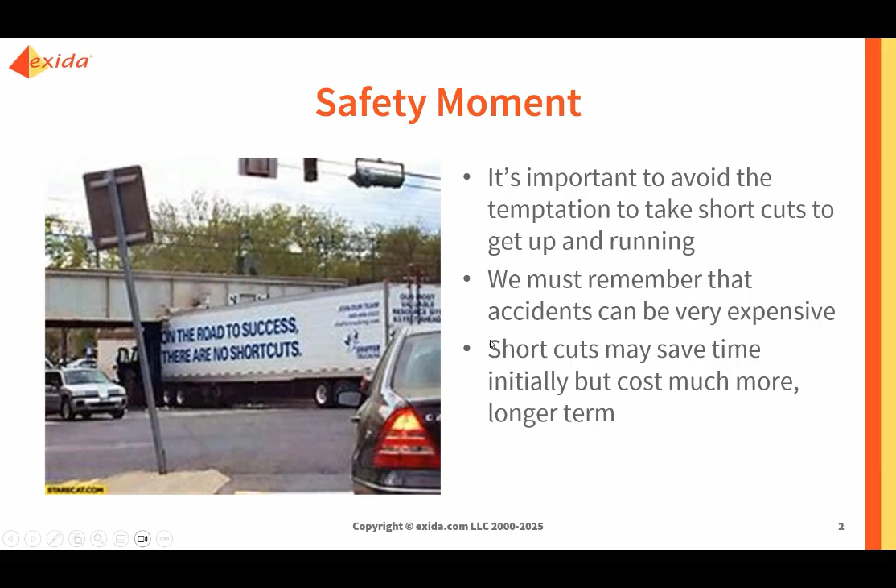Just before we begin, I want to take a safety moment to remind everybody that when we deal with functional safety, we have to avoid the temptation to take shortcuts to get up and running. This is always a problem when projects become a crunch and there is a rush to get finished so we can get the safety instrumented system up and running. We have to be wary of that, because what can happen is that systematic errors can creep in, and we could end up having issues further down the line that could lead potentially to some form of incident or accident, and we know these can be very expensive. So we must make sure that when we're looking to be successful, we cannot take shortcuts. That's just the thing to remember with functional safety that often gets overlooked when it's crunch time.

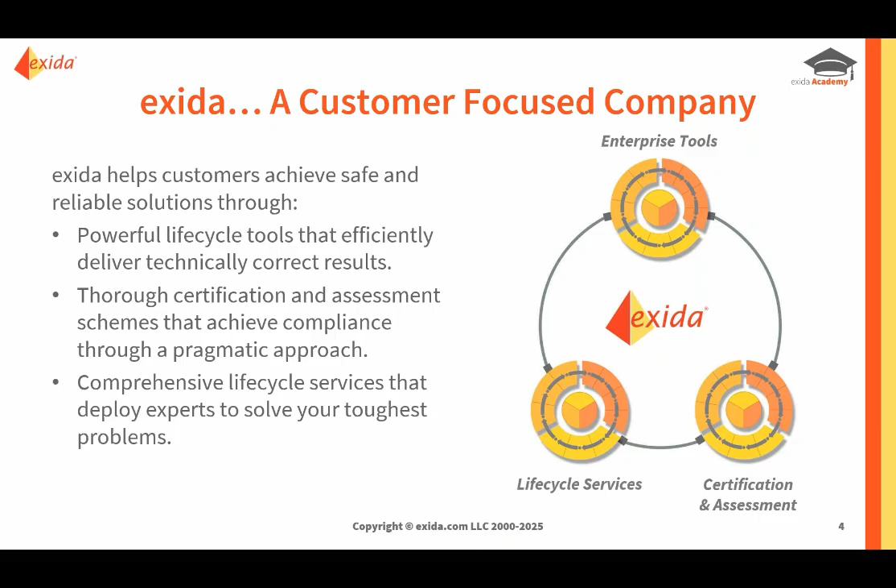We've grown exponentially since then. We don't just do certification for functional safety, we also do certification for cybersecurity and personnel certification. Some of you may even be CFSE or CFSP qualified. We've also started the Lifecycle Services division, which provides full lifecycle services for alarm management, cybersecurity and functional safety, including all the relevant training and documentation support. We also have a third division which deals with our software tools, the exSILentia tool, which some of you may be very familiar with. We've also grown from just the two original offices, we're global now. The nice thing about the three disciplines, functional safety, alarm management, and cybersecurity, is that it's industry agnostic. You can apply it to any industry, so we've worked in mining, pharmaceutical, food and beverage, oil and gas, chemical, machinery, etc.

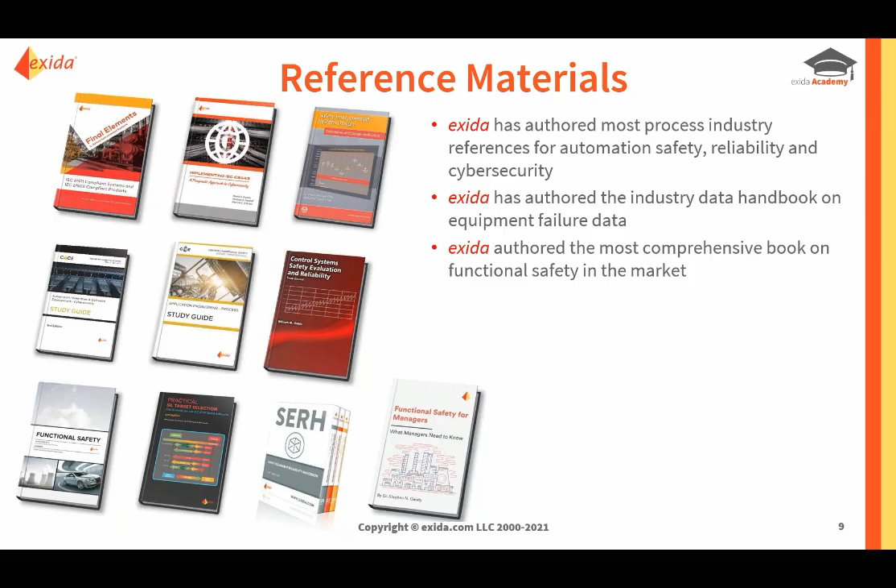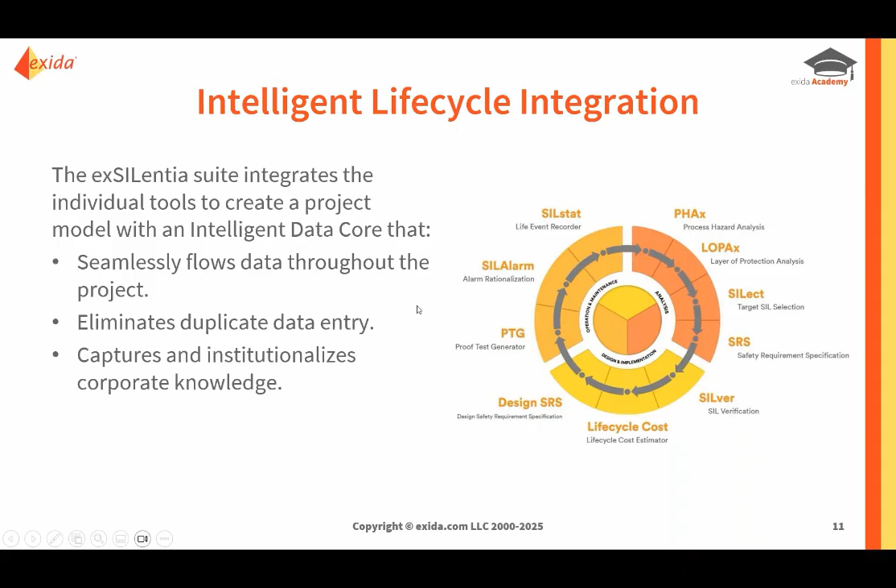The exSILentia tool allows us to do the full lifecycle support, so we can do the hazard and risk assessments all the way through to providing the life event recorder, so you can record all the safety instrumented system performance data as well. I'm not going to talk too much about that because I want to get to the meat of this, which is, of course, what is prior use justification and how to achieve it.

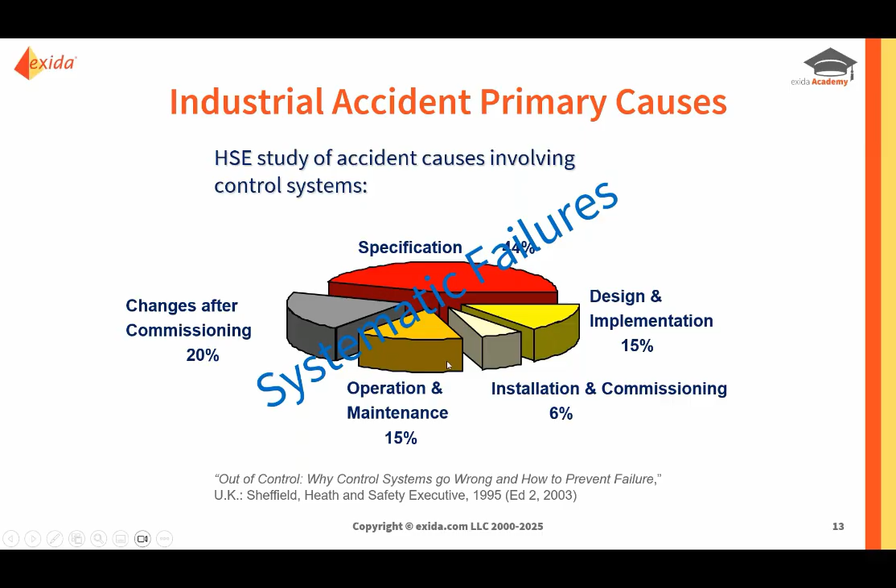Now, when it comes to the IEC 61511, it's based on a life cycle. And here again, it's different from previous standards since it's not prescriptive. A prescriptive standard would say this is what you have to do and this is how you do it - there's no leeway. Whereas with a performance-based standard, it will say this is what you have to do, but how you do it is up to you as long as you can measure your performance.

And with 1511 and 1508, they are both performance risk-based standards. Now, the major authorities, COMAH in the UK, OSHA here, requires operators of hazardous processes to follow best practice, or RAGAGEP - recognized and generally accepted good engineering practice. So 1511 and its equivalent, the ISA 61511, is recognized as being RAGAGEP.

And they're both based on a safety life cycle. So it's not a once and done, there are ongoing requirements. And there are 3 phases. There's an analysis phase - this is where we're analyzing the requirements for the safety instrumented system to help us mitigate identified hazards and make sure that we have sufficient risk reduction in place to meet our tolerable risk.

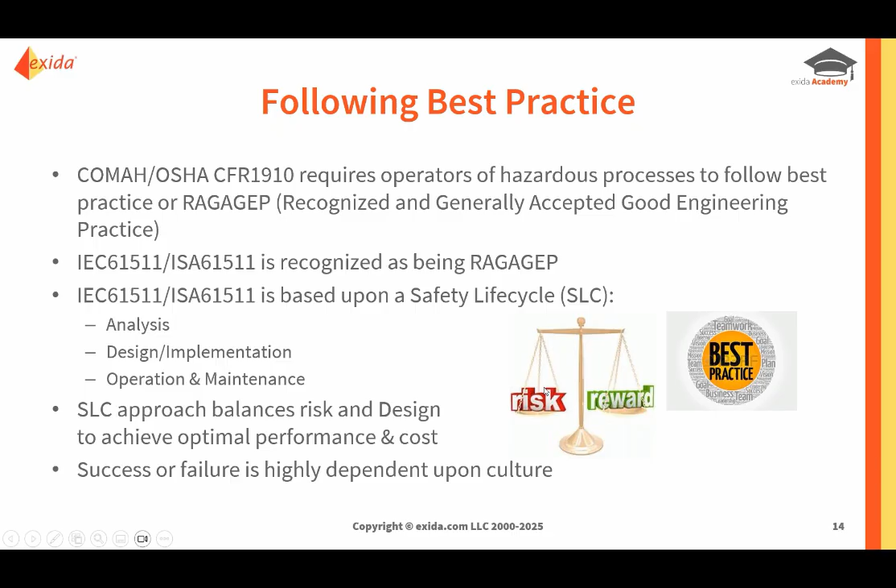So the objectives of the life cycle are really to help us build safer systems that don't experience a lot of the problems of the past. The thing about prescriptive standards is you can be compliant with a prescriptive standard, but you may still have a gap between what the prescriptive standard gives you and what your actual tolerable risk as defined is required.

It also helps us make sure that we have cost-effective systems that do match the design with the risk, because the life cycle is all about balance. If we get it right, it will work out well in the end. We may spend more time and effort up front, but that will save us time and effort at the back end.

Because if you're old enough to remember the old 20-20-20 adage, it was 20 weeks in design, 20 months in implementation, 20 years in operation. So the majority of the life cycle time for the SIS, the safety instrumented system, is going to be spent in the operation and maintenance part.

So we can design it properly, we can implement it properly, we can install it, commission it, everything's great day one, but if we don't maintain it and don't follow what's required from the functional safety point of view, then of course our performance is going to drop off a cliff.

So the objectives of the safety life cycle are help us minimize the systematic faults that can creep in. And systematic, if you like, can be characterized by what we call the 3 Ps. So the first one is people - do we have properly qualified and competent people to make sure they know what they're doing?

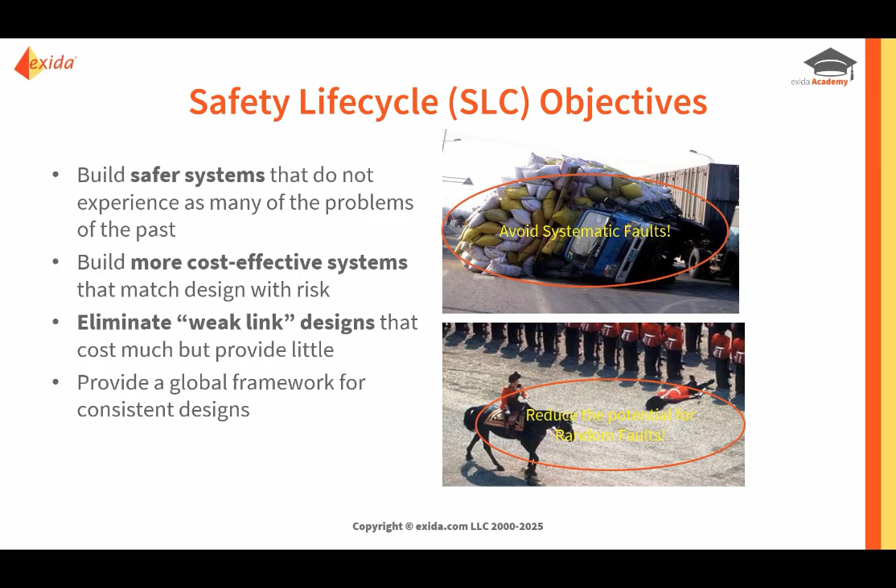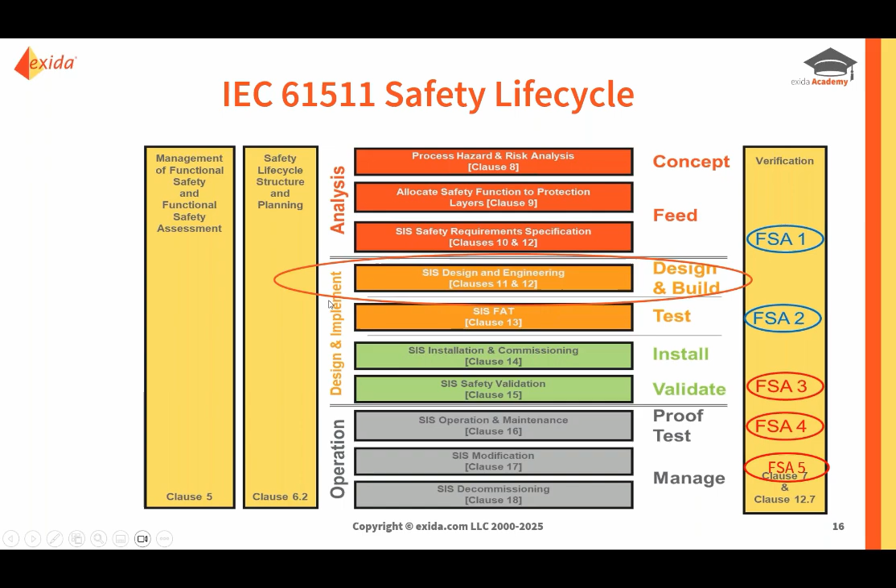If we look at the life cycle, there are 3 phases: analysis, design and implementation, and operation and maintenance. We're going to focus here on the SIS design and engineering, and how we qualify the equipment that's required to be used in the design. This is where the prior use justification may apply.

If we look at this in more detail, the 1511 standard requires us to justify the equipment we're using in our safety instrumented system and safety instrumented function designs. This is very important. The purpose is to make sure we are meeting the systematic capability for the particular device. So when it comes to performing the SIL verification, there are 3 things we have to meet.

Firstly, do we meet the random target? The random target is our PFD average or our PFH if it's high demand or continuous. Then we have to meet the architectural requirements - this is where we determine whether we need voting for redundant architectures, for example. And thirdly, we have to meet the systematic capability. So it's not 1 out of 3, not 2 out of 3, it's 3 out of 3. We have to meet all 3. So systematic capability is very important.

IEC 61511 gives us 2 methods for qualifying the equipment to be used in a safety instrumented function: we can either use 1508 certified devices, or we have to do the prior use justification.

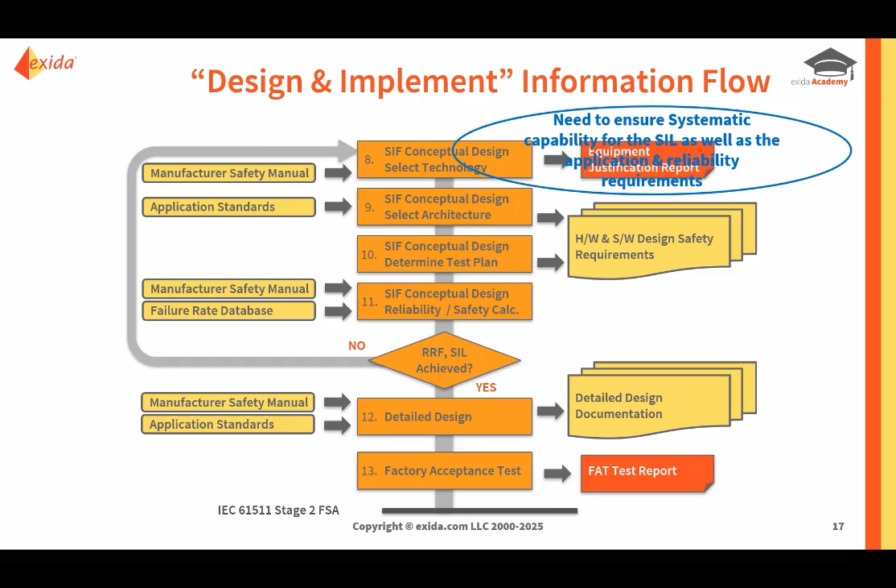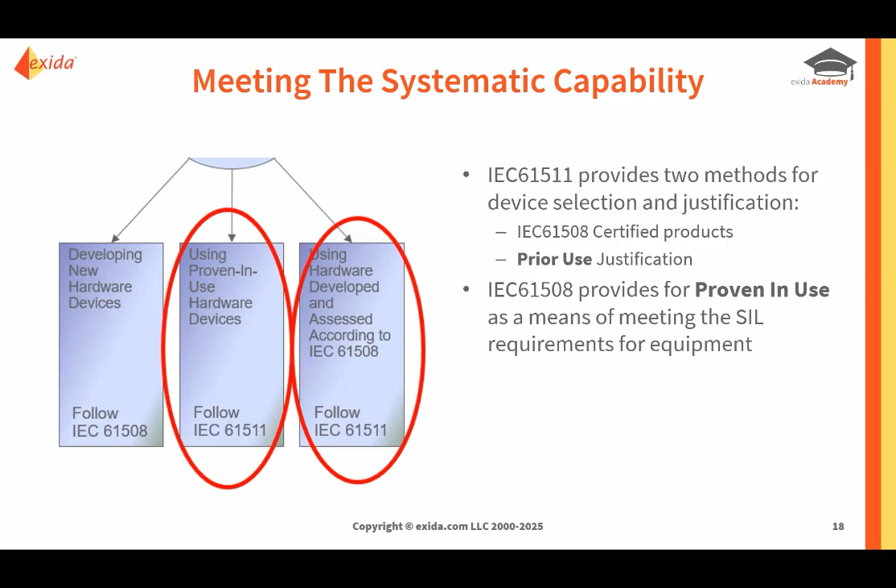Now, in 1511 it talks about prior use. In 1508 it talks about proven in use as a means of meeting the SIL requirements. They're essentially the same thing. The only difference is that proven in use is based on the manufacturer's design basis - the temperature limits, vibration limits, corrosion limits, desired maintenance support, etc. for the device - so it's more device specific. Prior use deals with the device's installed performance within a particular process sector, and of course that's the application, as well as the operating environment, which is often different from the manufacturer's design basis. So that's the difference between the two, and as I said, in 1511 it refers to prior use.

So the only 2 methods we have are to use 1508 certified devices to the relevant SIL capability, or if we haven't got a certified device, then we have to do a prior use justification.

And remember, people often say to me, if I take a SIL2 sensor, a SIL2 logic solver, and a SIL2 final element, I should have a SIL2 SIF. No, not necessarily, because you have to consider from the sensor to the final element and everything in between. So it's tip to tail and everything in between.

So if we're using, for example, interposing relays, then those relays need to be certified. If not, we have to do a prior use justification. Similarly, if we've got splitters, Zener barriers, positioners, motor controllers, etc., we have to make sure all the equipment is properly qualified in terms of the SIL requirements. If we have equipment that's not certified, then we have to do the prior use justification.

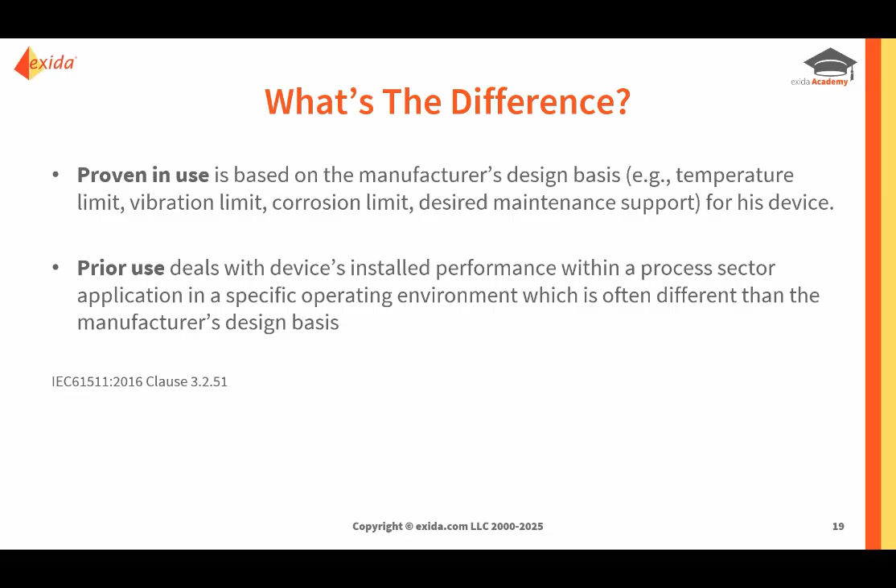So what does that mean? When it comes to the justification, we have to remember that it depends not just on meeting the safety integrity level requirements, but it also has to be suitable for the application - the operating profile, temperature, pressure, etc., as well as the process materials. If we've got corrosive process materials, then we have to make sure we select equipment that is suitable for that application. Both of these have to be considered, and then we have to document the justification.

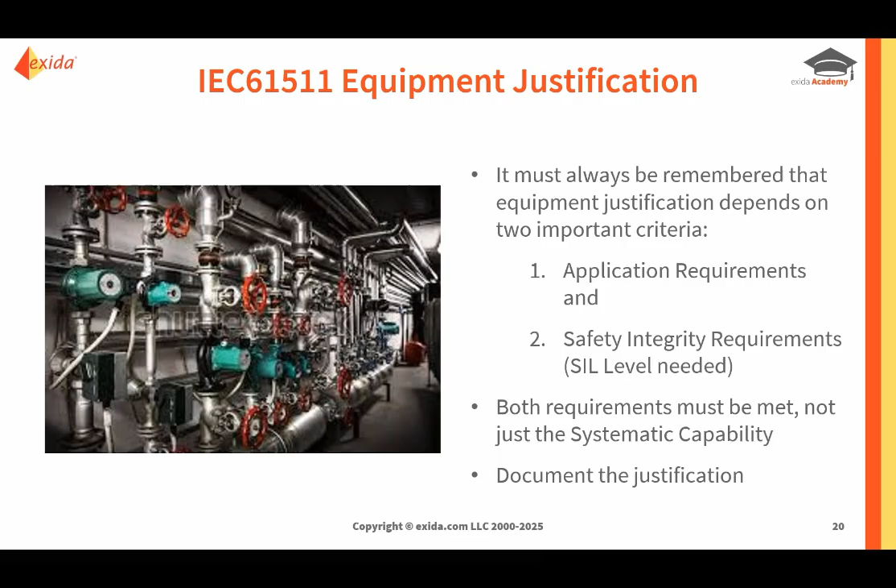With 1508 devices, it's easy because we can use the certificate to justify the selection. But if we haven't got a certified device, that makes life more complicated. So from the application point of view, we have to make sure the materials are compatible with the expected process conditions, but also, does it perform all the required functions? And is it rated for the expected environment in terms of temperature, etc.?

It's very important, and anyone who's been on the RFSC 100 that I've taught will remember that I always go on about the safety manuals. It's very important that you have the safety manuals, because they include important information plus any restrictions, especially if it has that nice word 'capable'.

What does it mean if it says the device is SIL 2 capable? It may mean that you have to have two of them, and they may have to be configured a certain way. So the safety manual is very important. If we're using certified devices, we should always make sure we get the safety manual.

Now here again, 61508 says the manufacturer has to have a safety manual, but it doesn't say they have to provide it free of charge. So you may end up having to purchase safety manuals or part of safety manuals. It just depends upon the particular manufacturer and what they do. So 61508 certified devices is the easiest way to justify the equipment use, as long as it meets all the other things that are mentioned here.

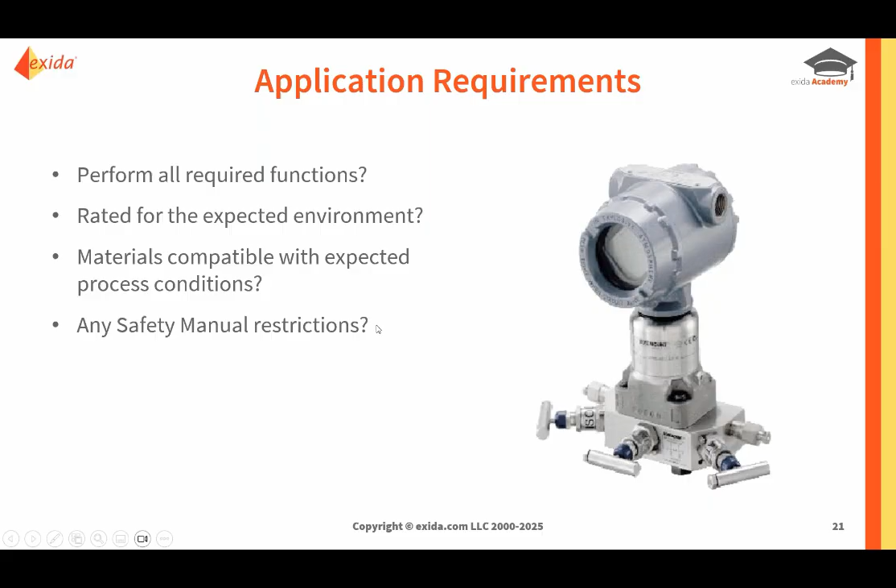If we don't have a certified device, then we have to perform a prior use justification. The purpose of prior use is to demonstrate the SIL capability of the device based upon previous operating experience. When we talk about operating experience, it has to be in similar operating environments. So are we comparing apples to apples or apples to oranges? This is one of the issues when it comes to prior use.

Sometimes people say, well, I've had this device and I've been using it for years and I have all this data. But the problem is the device that they have the data for is not the same version as the device that they're trying to get prior use justified. So here again, we have to make sure, is it similar in operating environment?

Because the primary intent is to make sure that we have sufficient evidence to prove that the dangerous systematic faults have been reduced to a sufficiently low level compared to the required safety integrity. So that's why we have to do the prior use, because if we use non-certified devices, it won't meet the systematic requirement.

So the SIF may meet the SIL target for the PFD average and the architecture, but it won't meet it for the systematic. And this is part of the problems that we come across, especially with legacy systems. So we have to make sure that the dangerous systematic faults have been reduced to a sufficiently low level, and also we have to make sure we meet the random failure requirement, which of course is to perform our PFD average calculation or our PFH calculation. So we have to do that as well.

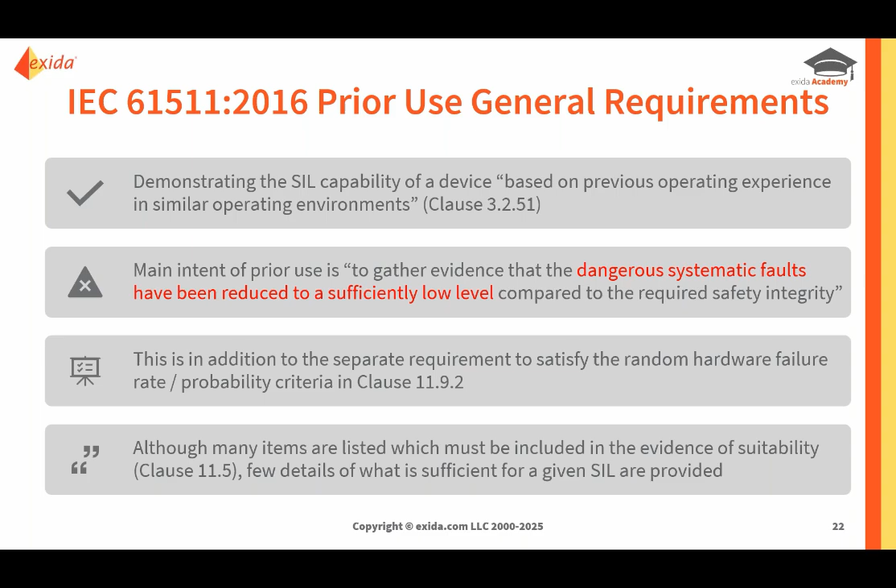61511 does list items that have to be included, but they don't give many details on what's sufficient for a given SIL. So this is left to interpretation.

Because of the issue of comparing apples to apples rather than apples to oranges, all the devices have to be identified with a specific revision number, not just the hardware, but if it includes any firmware, the firmware revision has to be included as well. And we have to demonstrate that all the devices are under the control of a management of change procedure.

If we have any fixed programming language devices, these would be sort of devices where you could set ranges or alarm limits, etc. in a panel. Those will have special SIL3 application prior use requirements, and you'd have to go and look into what was required.

For devices that have limited variability language, this really applies to application programming. So in other words, if it's a PLC, then we can only prior use justify for SIL1 and SIL2 with a number of additional requirements.

The other thing is the clarification on the issue of device engineering changes. As I said earlier, we could have two devices that have different revision numbers, and if we don't have sufficient data for the second device, then we have to look at what is the change from the first version and how significant is the change, because the prior use could be invalidated if it's a significant change. So we have to track that and make use of it.

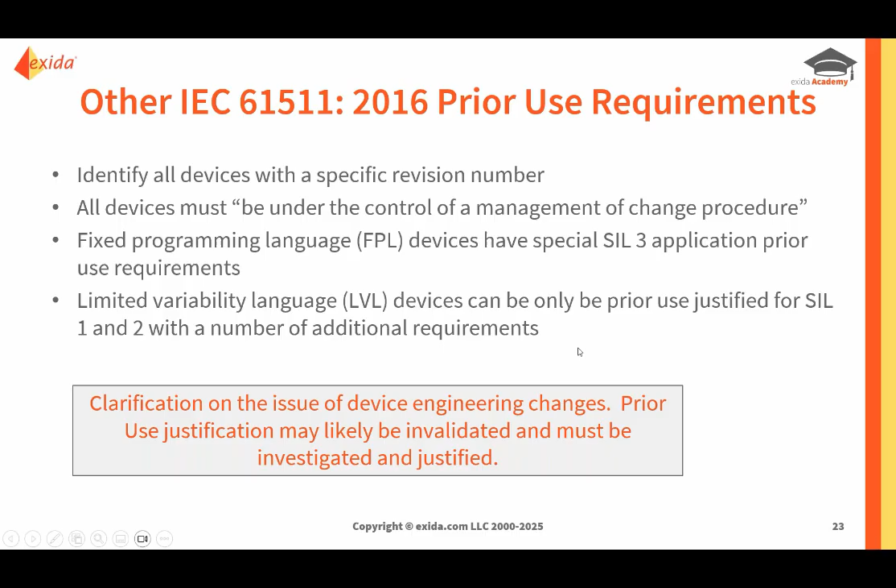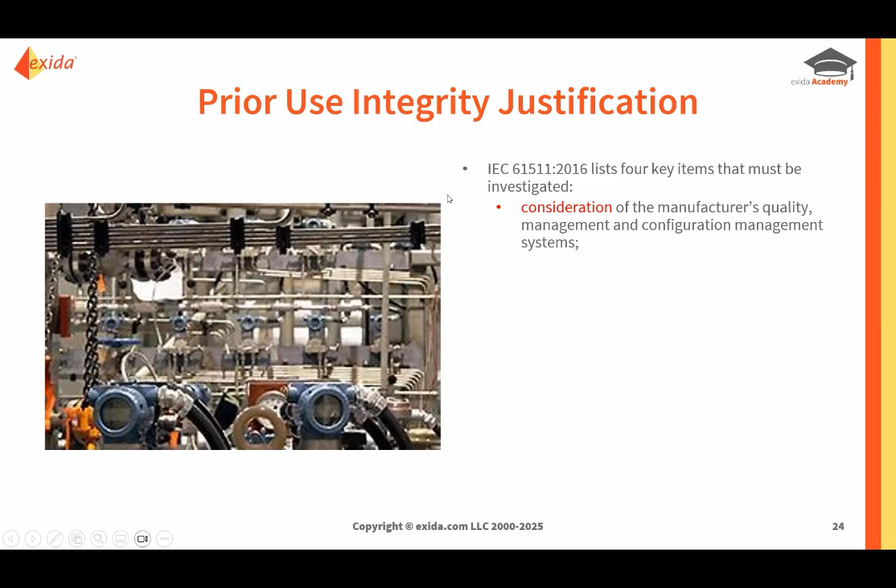So there are 4 key items that 61511 requires us to investigate when it comes to prior use justification. The first one it talks about is consideration of the manufacturer's quality management and configuration management systems. So that's a bit of a vague statement. What does that mean? We'll talk about that in a minute.

Then it talks about having adequate identification and specification of the components or the subsystems that we're using. So again, adequate is a bit of an open to interpretation term.

So we have to consider what we mean by adequate, and then demonstration of the performance of the components or subsystems in similar operating profiles and physical environments. This is very important to make sure we're comparing apples to apples and not apples to oranges.

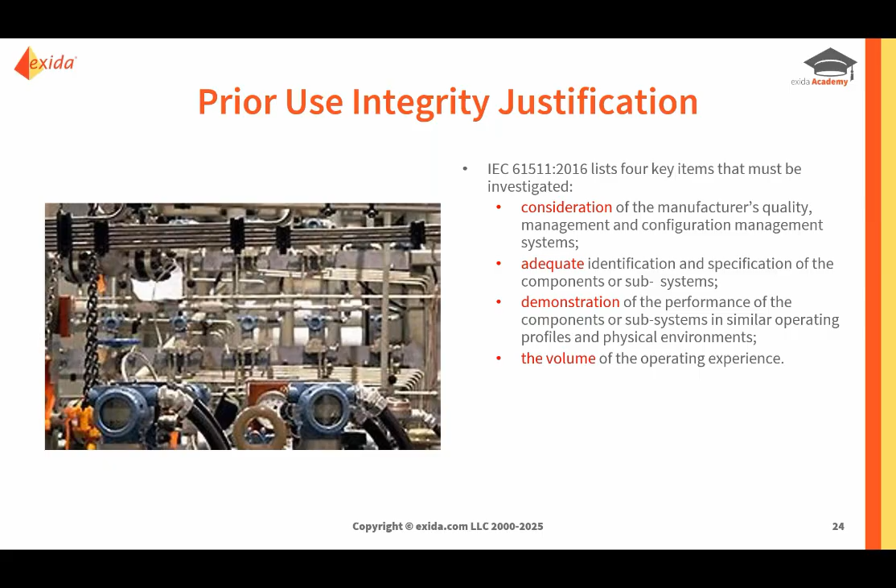And then finally, it talks about the volume of the operating experience. So again, what does that mean? That's open to interpretation. The thing to remember here is when it comes to the extent of the manufacturer's quality audit, this is where we have to look at how well it's documented, and of course the identification requirements as well as the volume of operating experience. So these things are not necessarily stated clearly, and are open to a level of interpretation.

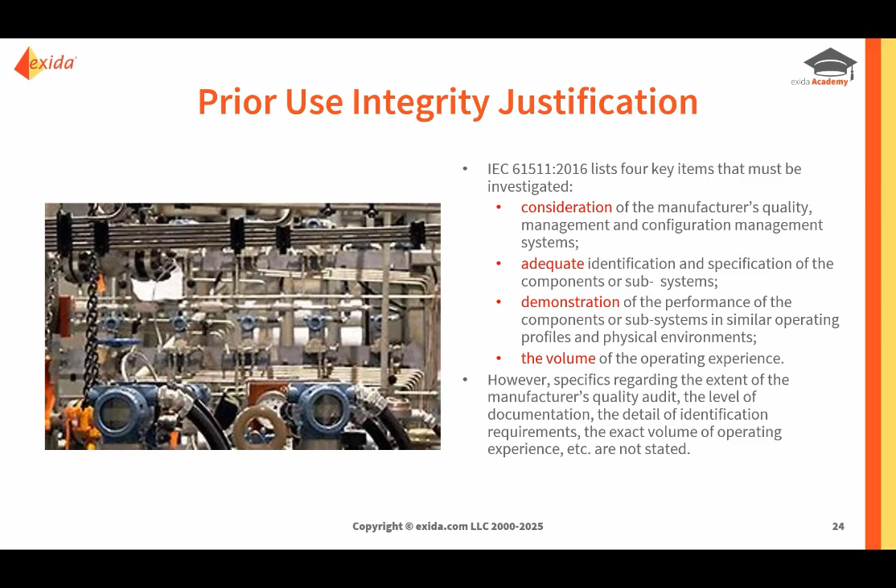So what does this mean in practice? Well, what it means in practice is that we have to have good, accurate, and properly maintained records. So this means that we have to have a quality data, field data gathering system.

In other words, how well have we tracked any field failures? Have we done the root cause analysis? The operating environment and application must be similar and justifiable.

So for field devices, we're looking at the behavior of the device in operating environments, and it can be either used in safety or non-safety. If the operating environment is the same, then it doesn't matter if it's in safety or non-safety, as long as we have the relevant documentation and evidence to support this.

When it comes to the investigation and root cause analysis of failures, this is important, and this is where oftentimes the systems break down because, yes, some end users may do investigation of failures, but do they know to determine whether the failure was initially safe or dangerous?

And typically with dangerous failures, we can usually find those through the use of proof testing, or the combination of diagnostics and proof testing, or because we had a failure on demand. So we need to know, was it a safe failure or a dangerous failure? And then if it was, whether it was random or systematic. This is another area where it's very grey and people are uncertain how to do that.

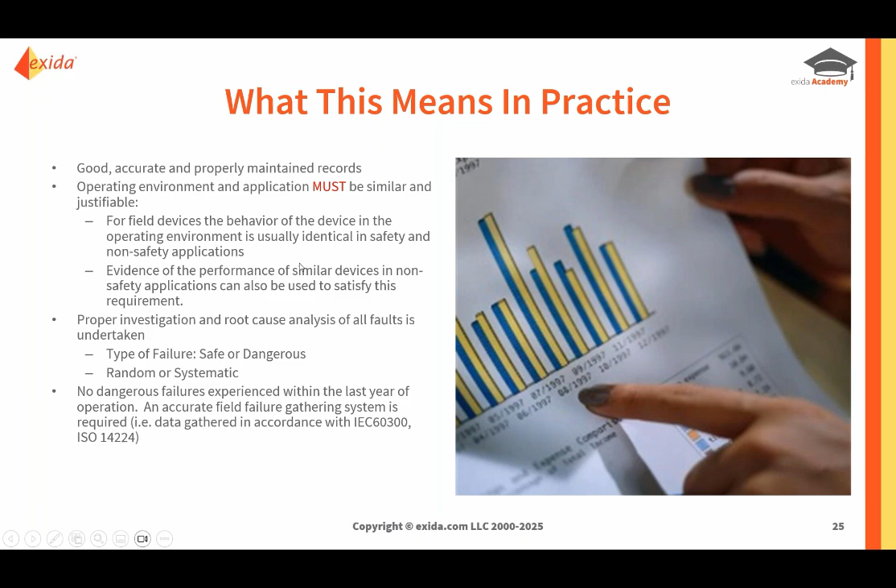So basically what we have to look at is our field failure records to see, did we have any dangerous failures over the past year or so? And if we did, were any of those attributed to, or could be attributed to, systematic issues? So this is what we would have to do. And as you can imagine, it's not that easy.

When it comes to the device usage and performance here, the list that can be used to support the claims needs to be updated and monitored regularly. So here we're back to how well are we keeping records. Field devices are only added when sufficient operating experience has been obtained, and then field devices are removed when they show a history of not performing in a satisfactory manner.

Now remember, this is for devices that are not certified, where we're trying to do our prior use justification. So the operating environment is included in the list where relevant, so that we can make sure, because for prior use, we can use non-safety applications to help justify if the operating environment and the application is the same or very similar. Device performance is going to be affected by the operating environment, as we know.

So the selection of the devices will need to be based upon the adequate performance of an installed sufficient number of devices in multiple installations for sufficient operating time. So here again, if you're familiar with statistics, we have to have a large enough sample and it has to be very relevant to what we're looking at.

This is the same thing. Do we have enough information that can be statistically relevant? And of course, are we looking at the same profile? If it's longer operation, those can help reveal failures, of course. And most of the time, this could be related to the specification, handling, the installation, and so forth, where we could introduce potential random and systematic problems.

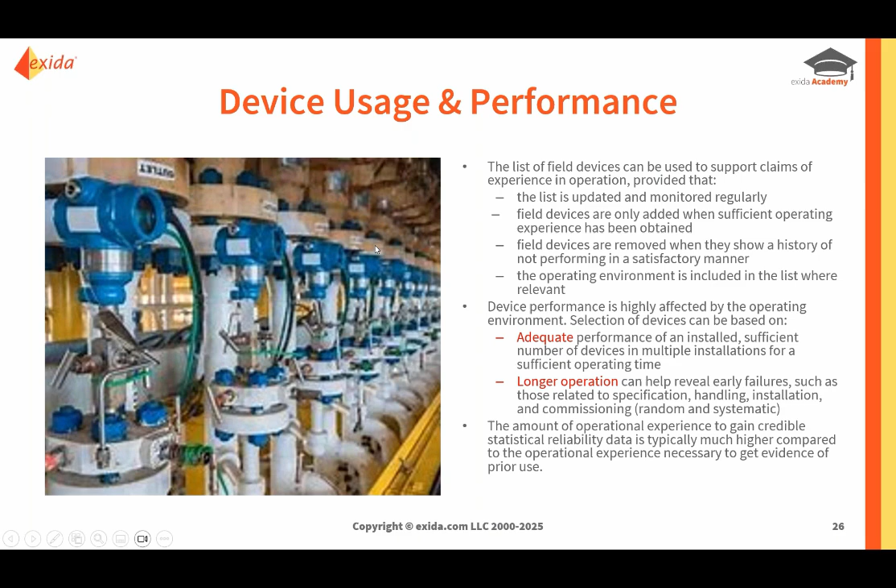So how can we do this in a more practical way?

1511 doesn't give you a defined time in use when it comes to doing the prior use justification. So what we tend to recommend is that the equipment or item must have been shipping for at least a year without any revisions or changes, and must be shipping for longer without significant revisions or changes. If there are changes, we have to look at the significance of the change to see if it's a minor change where we can justify using that data, or if it's a major change.

1511 doesn't have a defined operating experience, so what we recommend is about 30 million hours of estimated usage should be obtained from a minimum of 10 different applications, which have similar stress conditions and so forth relevant to what we're looking at.

Our prior use criteria has been derived from both 1508 and 1511. So this would give us significant hours to be able to demonstrate we have the data. And as long as it's relevant to what we're looking at in terms of the profile, then we can use that.

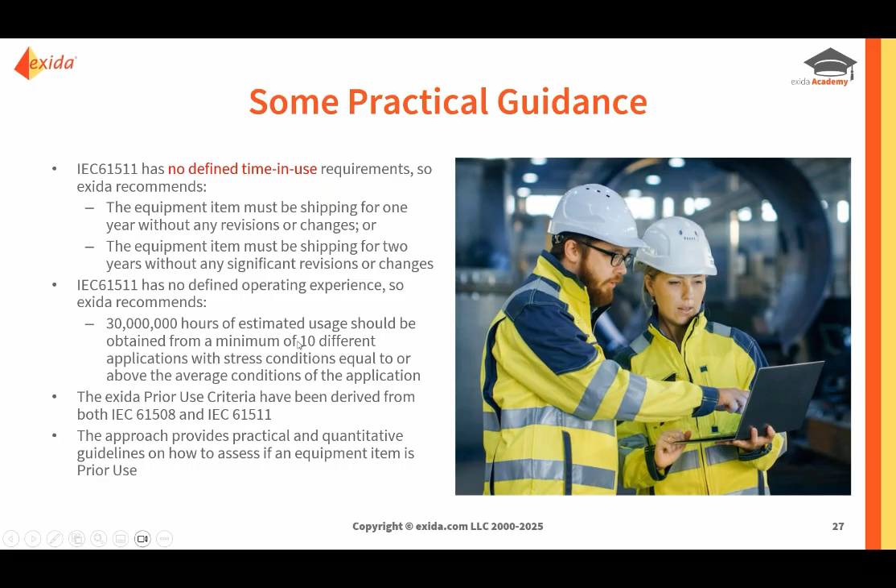So the approach will give us a practical and quantitative guideline on how to assess. And we do actually have in the exSILentia tool a prior use checklist that can be used.

So when it comes to estimating the number of hours in use, and this is often a problem, especially with legacy systems, we don't necessarily know how long the equipment's been installed and when it was installed. Sometimes people just consider the shipping dates, but that assumes as soon as you ship, the clock starts, which of course is not the case, because it can be shipped to a warehouse, it could be sitting in a warehouse for a while, there could be spares, we don't really know.

So in that case, if the actual installation dates are not available for the hours in use estimation, we can make certain assumptions. We can assume, for example, the installation occurs 6 months after the equipment item is shipped. As long as we're using reasonable assumptions that we can defend, then we'll end up with reasonable results. What we don't want is overly optimistic results, because all that will do is lead us into thinking we have a more reliable device than we actually do.

If the equipment has a wear-out mechanism, we mustn't exceed the useful life. And here again, with legacy systems, this becomes a problem because we don't necessarily know whether or not we've exceeded the useful life of the equipment. And here again, when it comes to prior use justification, we have to make sure it's within the useful life.

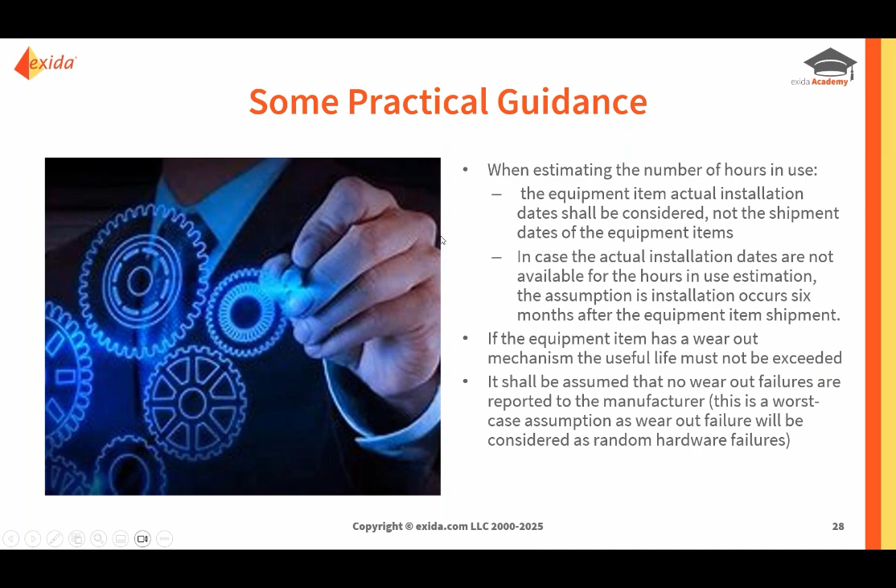So this is another thing when manufacturers try to do the proven in use justification for their devices.

So just to summarize then, the majority of the accidents that occur are usually traced back to systematic issues. And when it comes to the equipment, we have to make sure that the equipment, as far as possible, has been designed, installed, and implemented in a way that helps minimize the potential for systematic issues.

That's why, of course, if we're using certified devices, we know through the certification that there's a level of rigor that the manufacturer has applied to how they initially specified, designed, tested, and manufactured their device. So we have that confidence. When we don't know, or we have a non-certified device, we don't know how the manufacturer designed it and whether or not they did follow a proper quality system, such as an ISO 9001, for example.

Coming back to regulation, regulators require end users to follow RAGAGEP, recognized and generally accepted good engineering practices, and using one of the performance-based standards such as 1511 requires us to do selection and justification of the equipment used in safety instrumented systems and safety instrumented functions, and that they meet the required systematic capability.

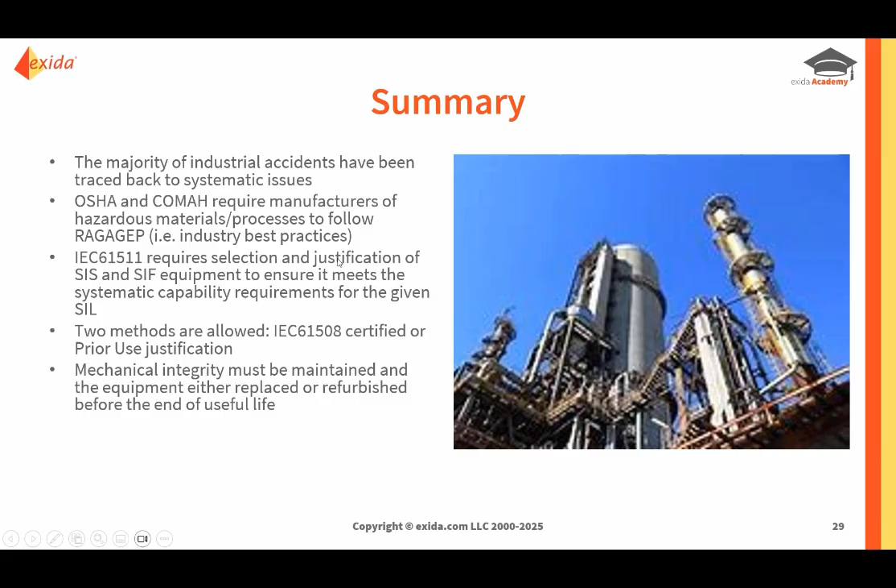Remember that for prior use, we have to have sufficient volume of operating experience in terms of the number of hours in operation, and the equipment has to be operating in a similar application environment. As I mentioned, it doesn't necessarily have to be used in a safety application, but as long as the environment is the same, we can utilize the hours. And of course, the devices are the same version, or if they're different versions, we have to assess what's the difference, because it may null and void us being able to use the previous operating experience.

So prior use will require us to track the versions to make sure it's based on the same version, or if it's a different one, how different is the version. We also have to consider certain assumptions regarding the in-service operational time for the equipment. These are some of the challenges as well, depending upon how well we've been documenting our field failure and field operational information.

So the operating profile has to be similar so we can justify it. And 1508 does provide some good guidance on the operational requirements and hours. As I said, at exida, if people want us to help with prior use justification, we have certain criteria to make sure we meet those four things.

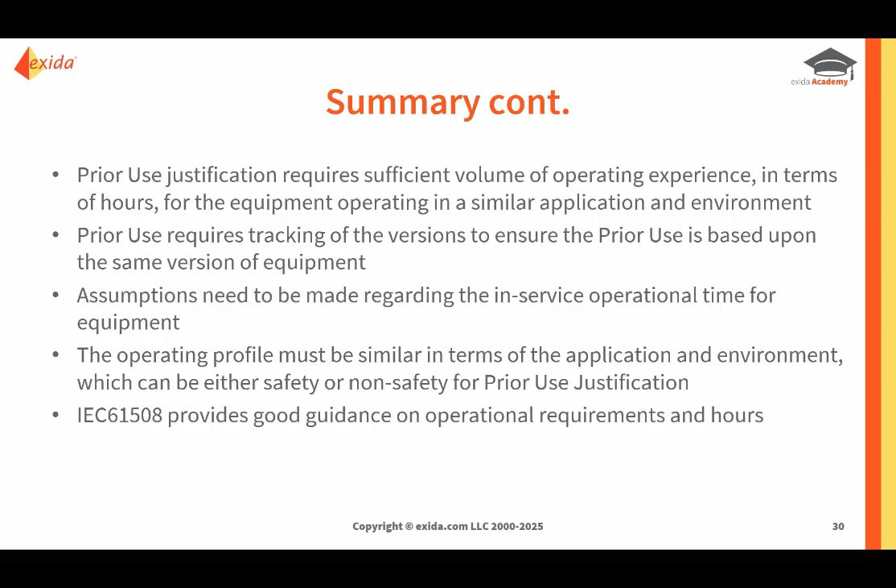Okay, so hopefully that's given you a clearer picture, and we can take some questions. Let's see what we have here. I've got a couple of questions here.

Are exida going to issue a new version of the SER which shows generic data? I think it's volume 4. I believe so. I don't know where it is, because that's the certification side of the business.

If a device is 61508 certified, let's say SIL 3 capable, does it mean that it is proven in use by the manufacturer? No. If it meets the systematic capability, that means it meets the 1508 requirements for being able to be used in a SIL 3 application. So certification is going to be a different method and route rather than doing the proven in use.

For a SIL 2 SIF for a motor emergency shutdown, we can ensure SIL up to interposing relays, but SIL rating for motor contactor breaker isn't usually available. Also, as per IEC 61511, prior use justification for them is not easy to claim, and I agree it's not easy. So we have to have a means of being able to do that. Now there are some certified MCCs now, so that might be an easier route to go.